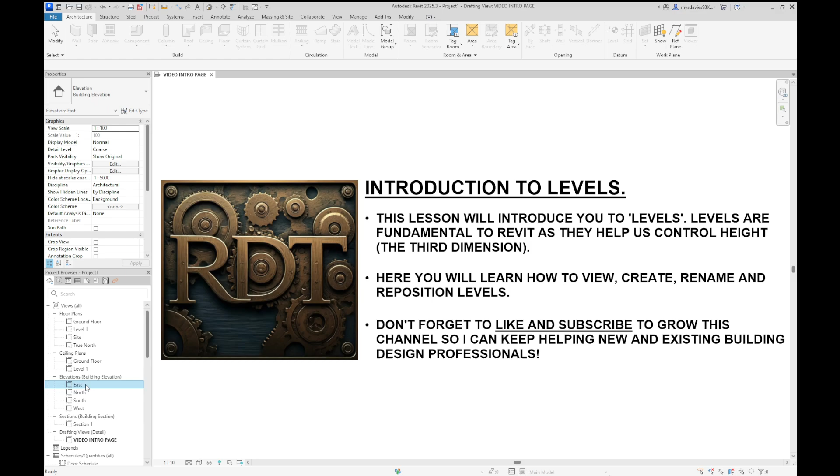Now, the best place to see levels is any elevational or sectional view. So you can do it from either of these by default. In my building elevations, I'm going to go to the east elevation and double click. So double left click. This shows us the elevational or side view of the project that we drew.

Previously we had built a topo solid using the ground floor as a constraint, and we had generated some reference planes to help us understand where the building goes. Now, by default in this Revit template, we only get 2 levels. We need more than this to accurately build a dwelling. And the first one I want to do is create a floor level for the house, like a ground floor level.

So we go to the architecture tab, we come across here to datum, and we have a button here called level, and there's a short code there, LL, that will also execute the command for you. So just click on that level button, a single left click. We get our drawing tools here. You'll see that we're only allowed to either draw straight lines or pick existing lines. Levels aren't curved, so we don't get that option.

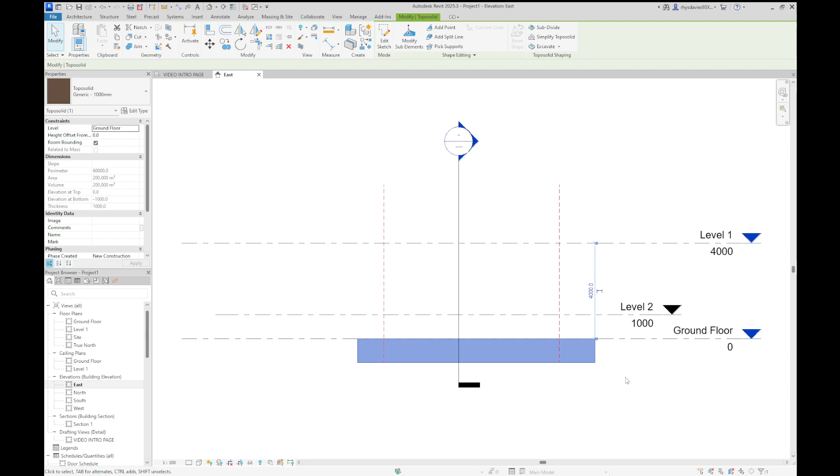What I want to do here is rename some of these levels to make more sense. So first up, the ground floor. This is our topo solid. This is what we would call natural ground. Now, natural ground is not normally dead flat, but we're using that as an example. So I want to rename this level to better represent what it's lining up with. Instead of ground floor, I want to change this to natural ground.

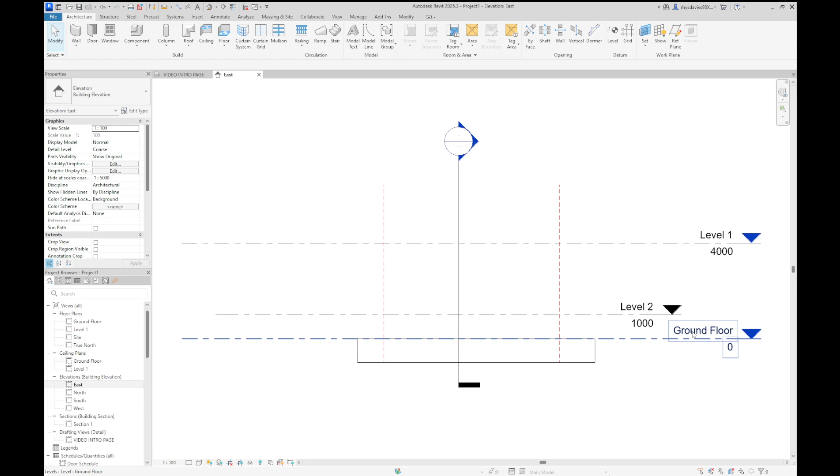So I go to the name of the level here. If I click in there once and then click in there twice, I get a text box that I can then change. So I'm going to change this to natural ground. I hit the enter key, and it asks me, do I want to rename my corresponding views?

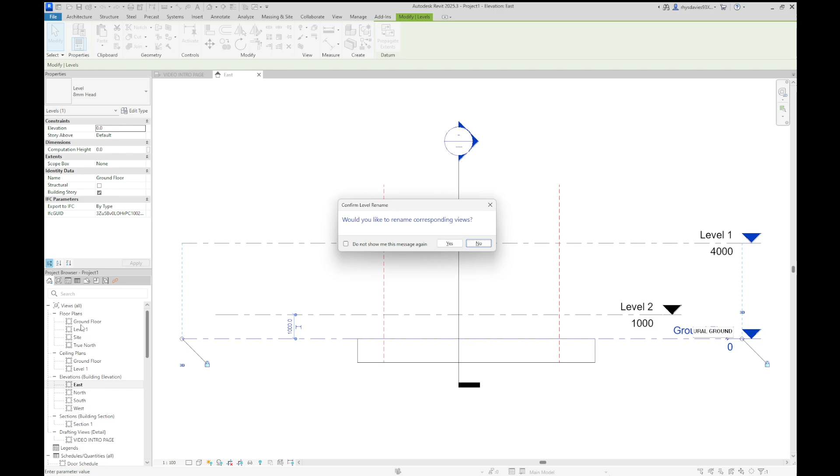And the answer is yes, because I want this ground floor plan here in my project browser to be updated. So if I go yes, there it is. Natural ground here equals natural ground there. So that's the floor plan that corresponds with the level. What I can now do here is this level 2.

Show you a little trick here. Okay, you'll see here that the level 2 is overlapping the natural ground. It can be a bit untidy. If I go to the left hand side of the level 2 thing, you'll see a little checkbox here, or what we call a bubble.

Okay, if you click on in there, you'll get a little tick and the name of the level will appear there. So you can choose whether you have the name on both sides, one side, or no sides. You can turn them off. Okay, so that becomes your choice. So if I wanted to do that, I can go here, right, level 2, natural ground over there. I've got no crossover. I can easily read everything.

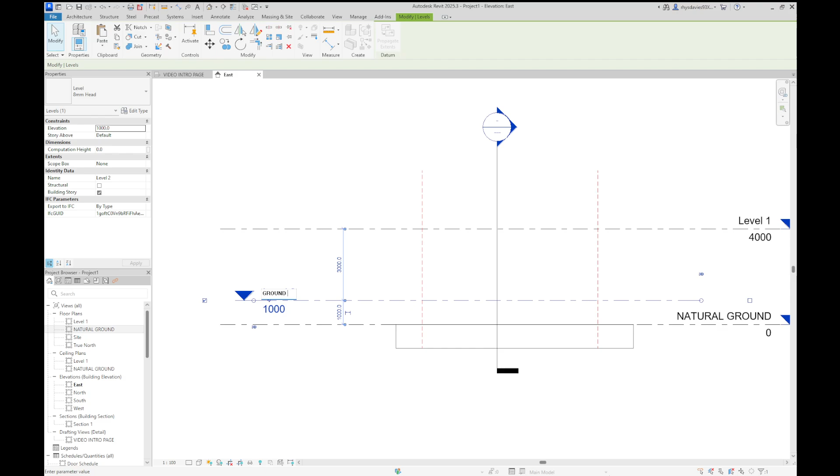Now I'm going to do a renaming here. I'm going to click on this where it says level 2. Now I'm going to call this one the ground floor. Okay, and clicking out of that a couple of times with my left mouse button. Okay, so what I've told Revit is you have natural ground, which will be the soil that you're building everything on. That's at 0. The ground floor is currently sitting at 1000 millimeters above that.

The last one I want to sort out is this one here, level 1. Okay, so I'm going to change this. I'm going to change its name from level 1, and I'm going to call it ceiling. Okay, and I'm going to click out. Yes, I want to change the names of the corresponding views.

And the last thing I'm going to do here is I want to change the height of this level here. So at the moment the ceiling is saying 4000 millimeters above ground, but you'll see here as well I have what's called a temporary dimension. Okay, temporary dimensions appear when you select elements and it can find something that's parallel or has a dimension that it can make sense with.

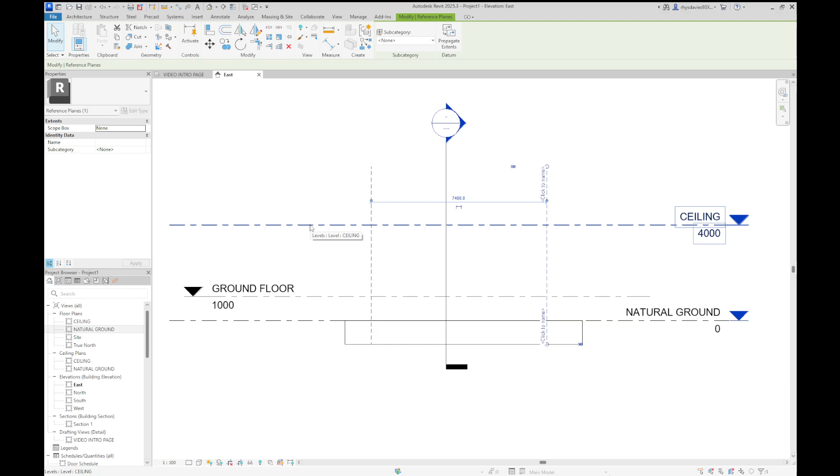Yeah. So if I select the ceiling level, it gives me a number of 3000 millimeters. Now that's too high. Okay, I don't want a really high ceiling level for this. So what I'm going to do is I'm going to click on this temporary dimension length and I'm going to change it to 2400. Okay, this equates to roughly 8 feet in imperial measurements.

Okay, and this is the minimum ceiling level in Australia according to our National Construction Code for habitable spaces. So this is generally the minimum ceiling height that you would build any house to make it feel comfortable and to gain compliance. So I'm just going to left click or enter that.

You'll see there that this number changed, which is the ceiling's level distance relative to natural ground. So that dropped by 600 millimeters. And the level itself physically moved down. Okay? So I'm going to do that another time.

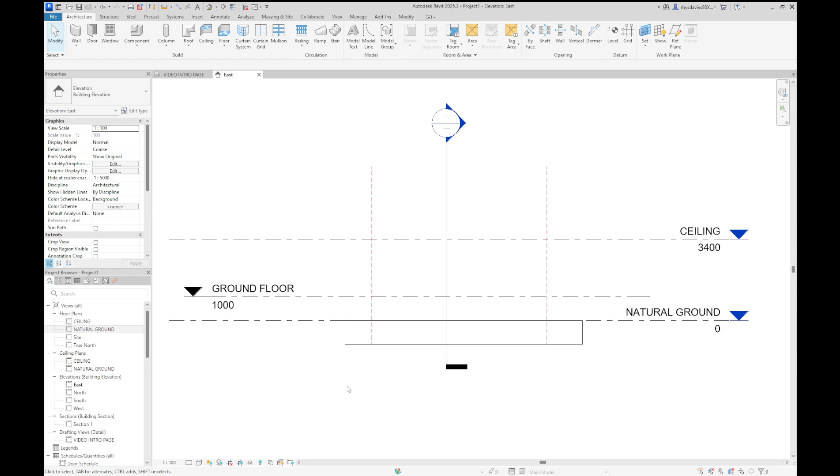I'm going to change the ground floor plan. Actually, I'm going to show you, yeah, no, we'll do it this way. Okay, so I'm going to do the ground floor plan. Maybe I don't want it so high. Okay, so instead of 1,000, I'm going to make that 800 millimeters there. And again, watch what happens.

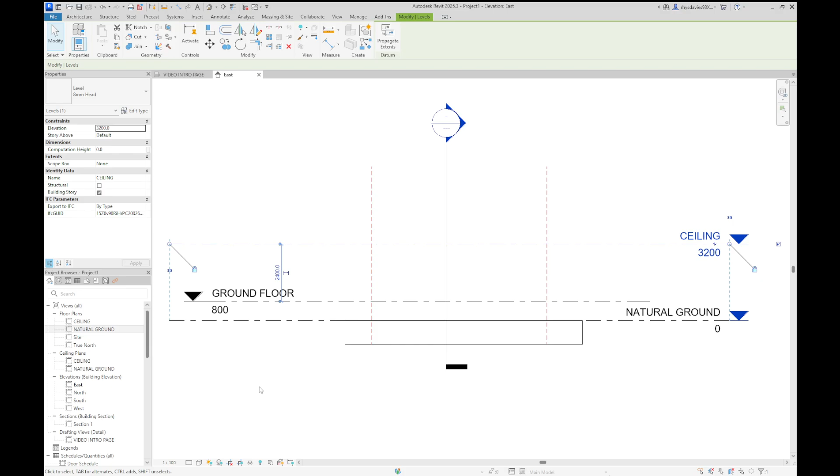The ground floor moved. Okay, that level physically moved in place. You'll see that the ceiling level didn't move, and that's now incorrect again. So it gives me the opportunity to show you another repeat. Okay, so I've clicked the level, go to my temporary dimension, and type in that number again. And again, I've brought that ceiling level down to that minimum ceiling height that compliance requires us to do.

Okay. So what that does is that it sets us up for the next video, which is to create a floor. And the floor we're going to create is going to be at the ground floor. Okay, so that's why we did this.